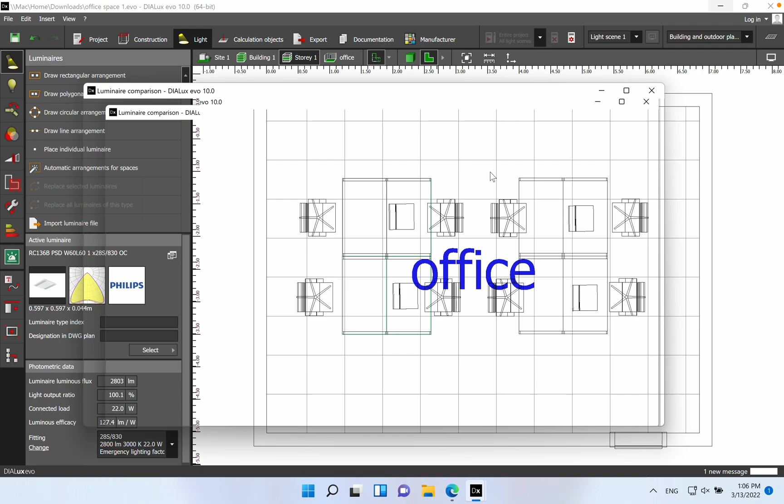I will then go with the same type of luminaire, just a different lumen package. I would suggest to go for 4000 lumen, and then I choose a low lumen package of 2800. So the first option is using a panel, which of course has dimensions of 600 by 600, but we also have the options of different lumen packages. So the lowest one 2800, middle one 3400, and the highest one 4000 lumen.

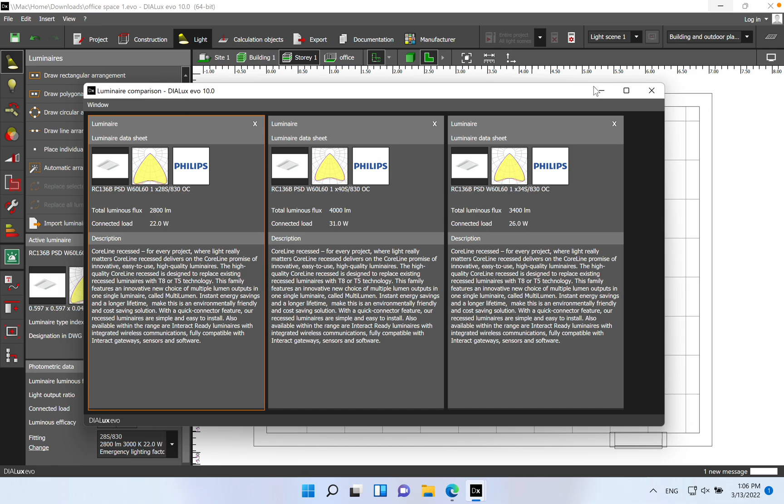So basically it's very important when you have this kind of plasterboard ceiling, if you want to use as few luminaires as possible, then I would recommend to go with a high lumen package, and then you can also do a spacing. So it's also very important when you have this kind of ceiling that you have a spacing. Let's start with 3400. I place the first luminaire

in the first quadrant. So here is the first one, and then typically spacing, so from this side it's 1.8 meters from one luminaire. So you have one luminaire, then three spaces empty, and then the next luminaire. And we will do the same thing on the other axis. So three spaces free, and then we have another luminaire.

And let's see the outcome if we go with this setup and a luminaire with a luminous flux of 3400, and then I want to use the same luminaire but just with a different lumen package, and see what the end result would be. The height of the room is 2.7 meters, so I'd say it's a standard height for an office.

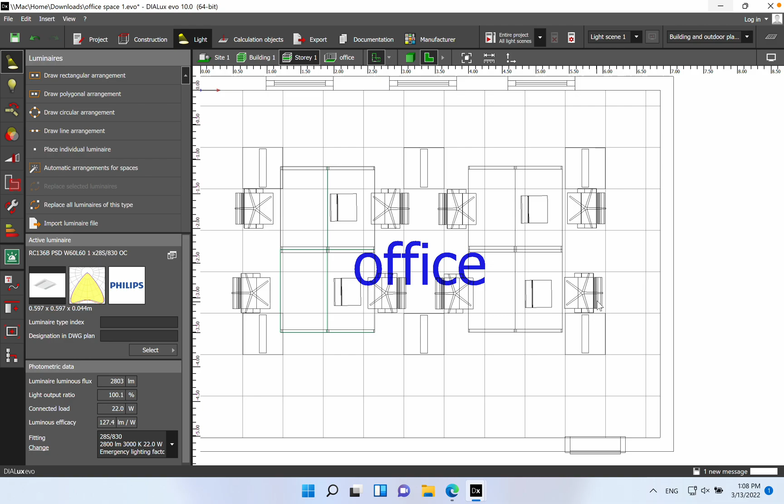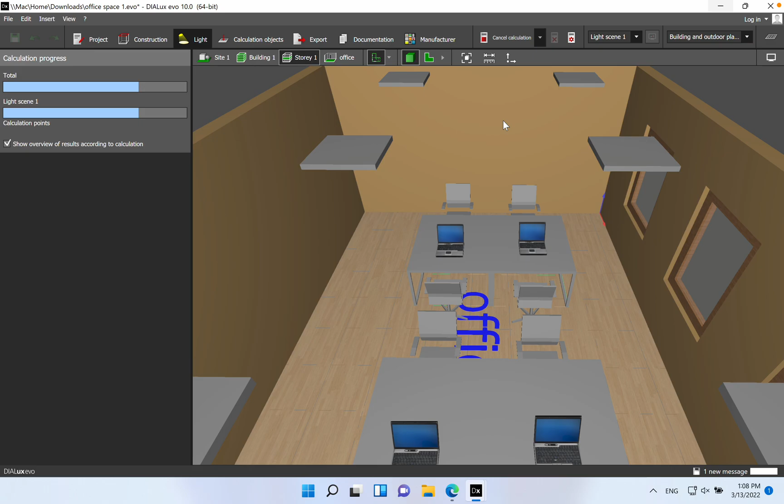And now we have the distance between two luminaires. In both axes we have 1.8 by 1.8, so this will be 6 luminaires, the first setup on this ceiling. So let's start the lighting simulation to see what we'll obtain. If you don't know yet, the illuminance value for an office is 500 lux. All these luminaires are UGR less than 19, so office compliant. Good. So we have the first results. As we can see, we are at a 400 lux level.

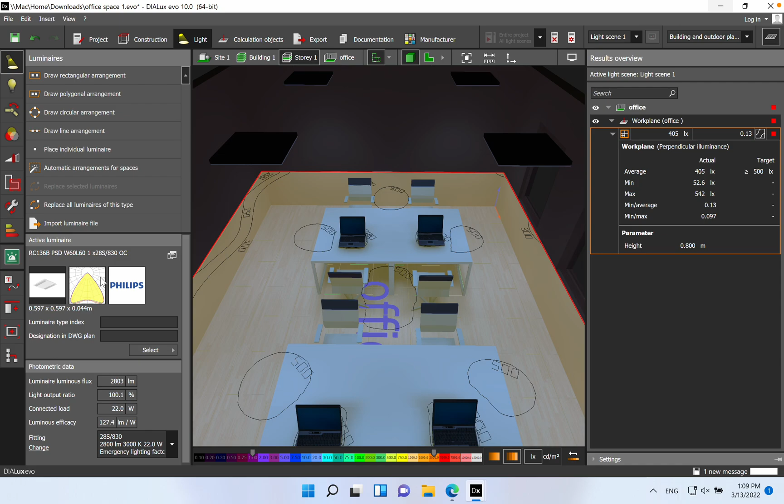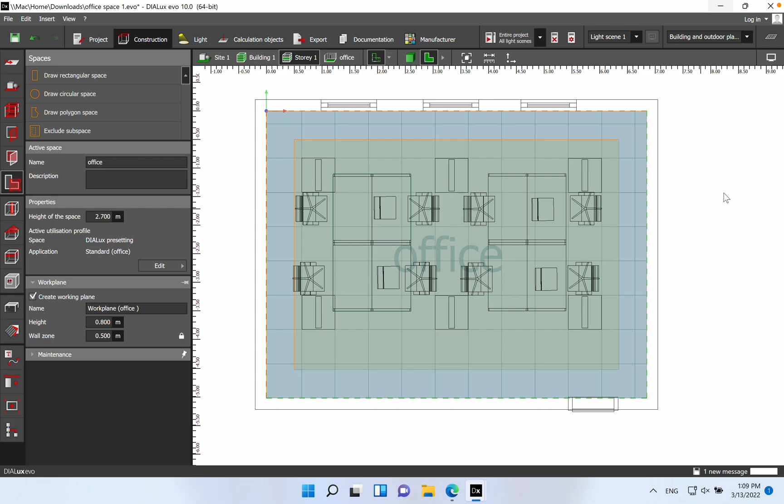So in this setup, even though we have a very nice light distribution curve, which is typical for an office, by the way, we're not able to fulfill the 500 lux. In addition, even though in this space we don't have furniture, I think we can eliminate a zone. In offices we can usually do 0.5 from the walls, just to have the correct information. So we can eliminate 0.5 from the walls, where usually we have, for example, shelves, and then we will get the right calculation in this situation.

However, I definitely want to change to a high lumen package for this simulation, because still, as you can see, it's 400, we improved to 435, but still below 500. So good. Now let's choose the 4000 lumen, same type of luminaire. So I select this one, and now let's replace the existing ones which we used in the previous calculation. So I choose this one. We just apply.

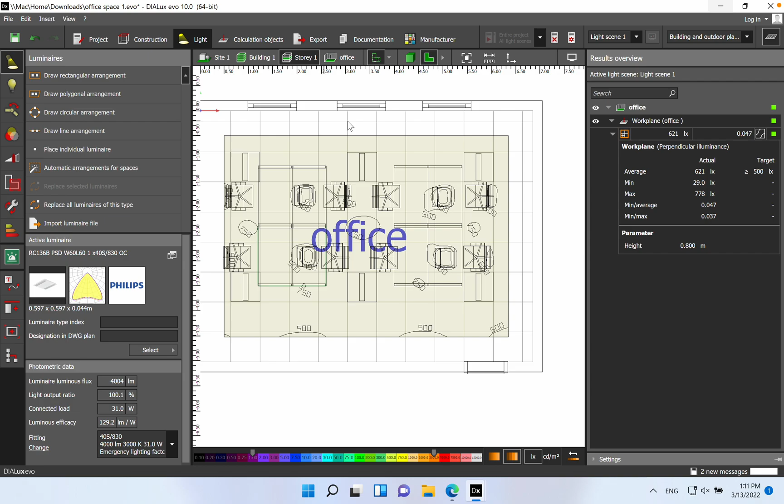Good, and now we need to run. So now we have the 4000 lumen luminaire. Let's start a new calculation once again. And as you can see for this example, by using just 6 luminaires for this space, if you go with 3400 lumen with the spacing of 1.8 by 1.8, it will not be enough. If you go with the 4000 lumen, we are 120 lux above the target. And if you now eliminate the zone, then we'll be at 500 lux. So actually, for this space, this will be the solution.

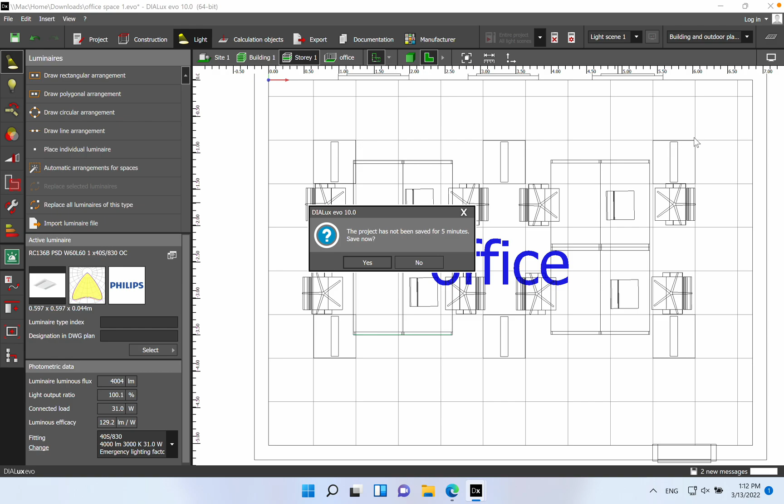Of course, we can try to change the spacing, and I will do so in a couple of moments. So as I said, this is a typical setup: 3 spaces of the plasterboard empty, and then you have a luminaire. But now I will make some changes. I will go with the low lumen package. I just want to show you a comparison of how many of those luminaires with a low lumen package we will need to reach the value of 500 lux. So this should be, it's loading.

For some reason it's not changing actually. Let's try to apply. Yeah. So you can see here that we have the low lumen package. Okay. So we have the 2800. Of course, we need to change the spacing. So I will just move from this. I will just leave 2 luminaires. So it will be 1.2 meters. And then I will just add another luminaire here.

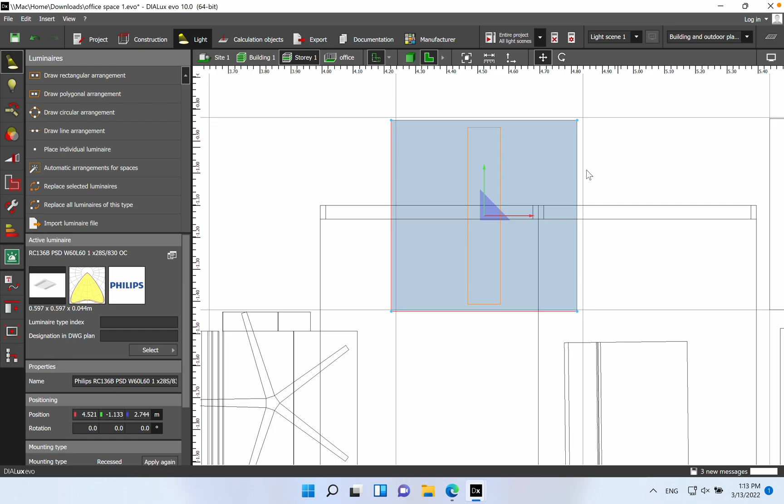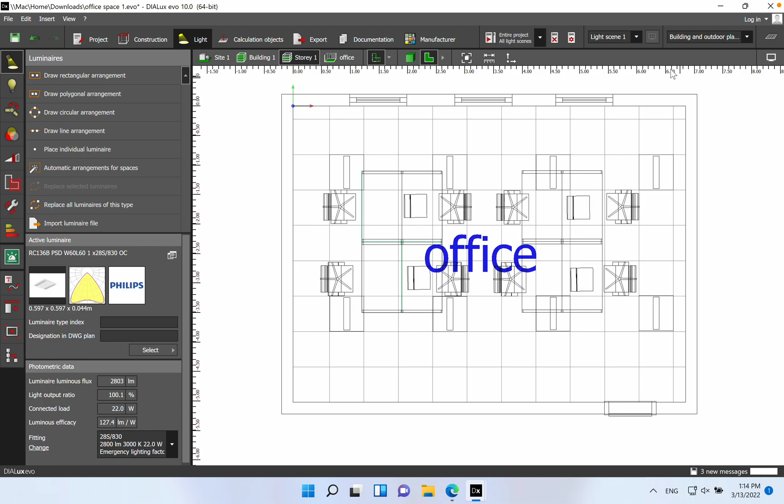This one, I will move it back. Actually, I'll try to just do it on horizontal, just to see if with 8 luminaires we can achieve the illuminance level of 500. So now we have 8 luminaires. Let's start a fast calculation. So we reduced on horizontal the distance between 2 luminaires from 1.8 meters to 1.2.

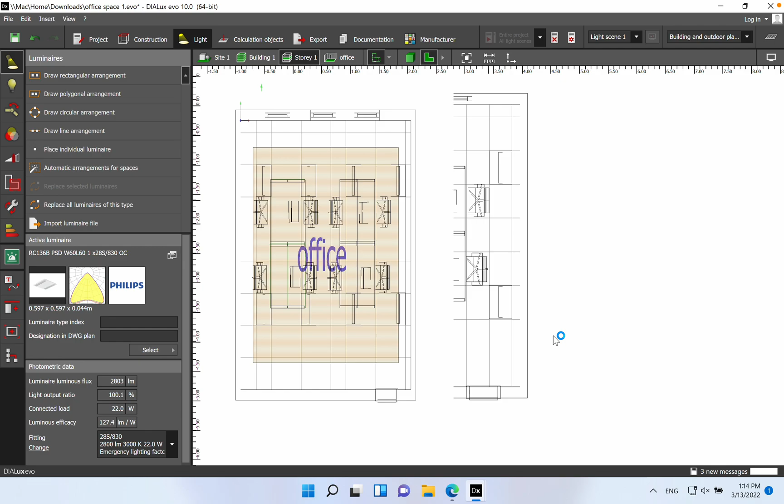Maybe you are asking why the same luminaire with the same optic has 3 different luminous fluxes. I think the answer is very easy. In most cases, we are speaking about office buildings which need a refurbishment. So we need to keep the luminaires in the same position. Then you cannot go with the high lumen package of 4000 lumen, or even with the middle one of 3400. So you need to go with the lowest one, as you can see in this calculation.

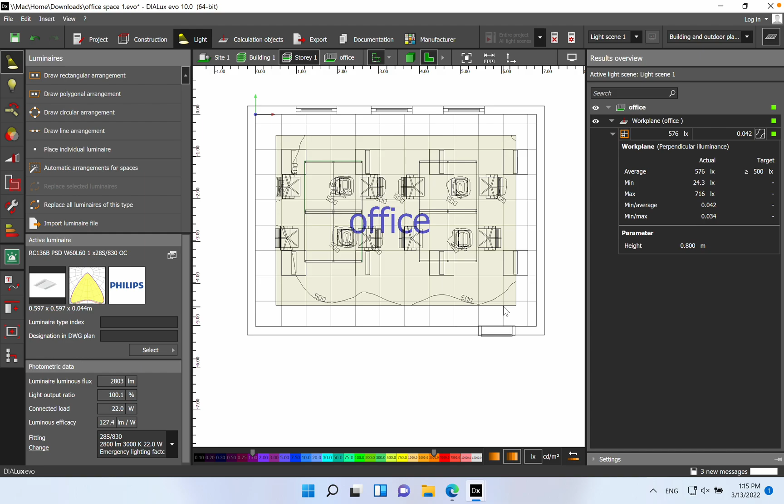Even if this means using more luminaires, because the layout of the ceiling has different installations, like fire detection, HVAC. You cannot change the configuration of the ceiling, and therefore you need to go with a different lumen package. And the result you see here: by using 8 luminaires, we achieve an illuminance of 576 lux. So keep in mind the main purpose of having the same luminaire with different lumen packages is to give you more flexibility when we speak about refurbishment.

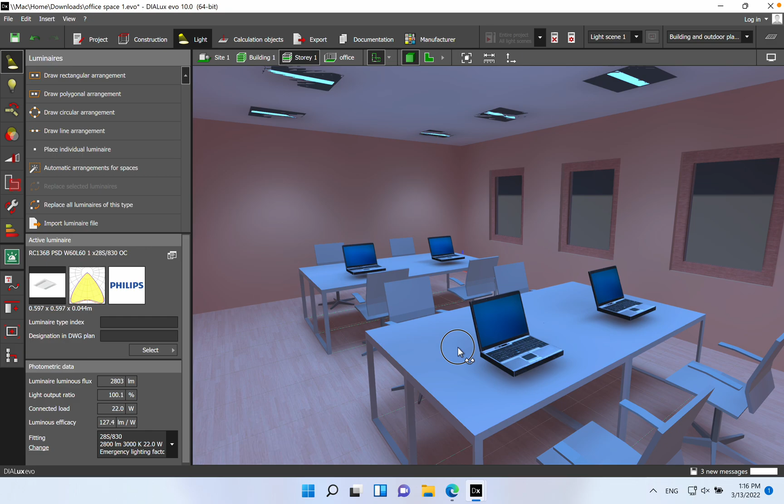This means direct replacement of the old technology, like 3 by 14 watt, which was equipped with T5 lamps, or 4 by 18 watt, which was equipped with T8 fluorescent lamps. So that's very important. Of course, when you speak about a new office where you want to establish a lighting calculation, then definitely you will go with 4000 lumen, using fewer luminaires, or the medium one, which is 3400.

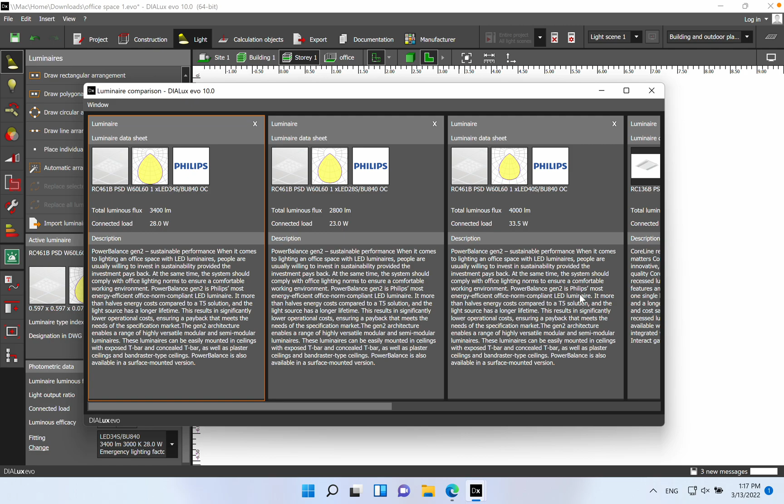What I want to show you as well is another luminaire, this one with lenses, and as previously we have different lumen packages: from 2800, 3400, and up to the highest lumen package of 4000 lumen. So for this kind of application, where you have a plasterboard ceiling with a dimension, as I mentioned earlier, of 600 by 600, I think these luminaires can be used without any problems. It's just the spacing on that application you need to pay attention to.

So here is the second luminaire set with the lenses, the optic system. So it's 3400, 2800, and 4000. Results will be more or less the same as with the panel. However, if you check the light distribution curve, I like the panel one more than the one with the lens. Here on the panel we have a batwing, so this is ideal for office applications. On the lens, on the other hand, it's not so nice.

But yeah, that was my message today related to the plasterboard ceiling, and how you can make a difference when you propose a refurbishment or a new lighting solution for this kind of requirement. And as I said earlier, take care of the spacing that you need to achieve, and based on the spacing you need to choose the lumen package which will come with the luminaire itself.